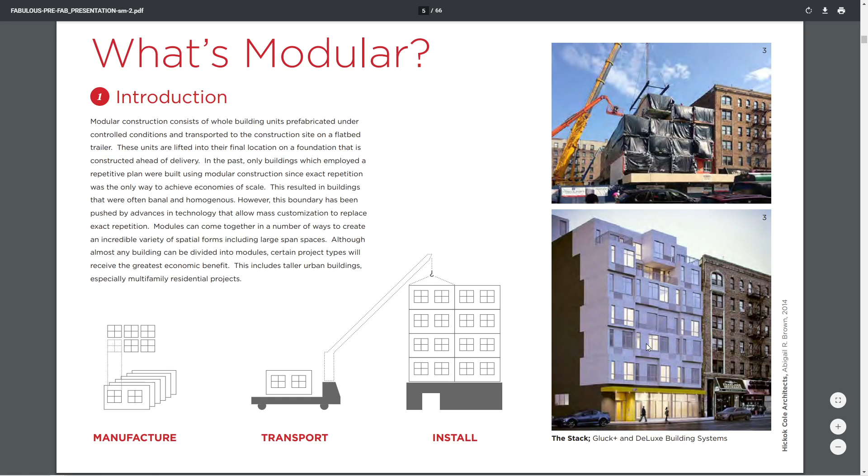You have the hyperlink from the slideshow, take some time to look at this. They introduce us to the idea of modular construction, obviously for people who have almost no architectural experience. The idea of it going up, you see the weather protected modules, notice the crane, the hoisting rigging up here, and then the finished look of that project.

What's going to happen is we look at why modular. They talk about faster schedule. That could be significant on a project depending on where it's being built. But there is this idea that by using modular components, we can have a shorter lead time to the completion of our project. Cheaper labor, work done in factories, less time doing the work because it's more regulated.

More control over the labor source. But there are also negatives with this idea of cheaper labor. Do we have control over the exploitation of labor? Is there equitable work standards?

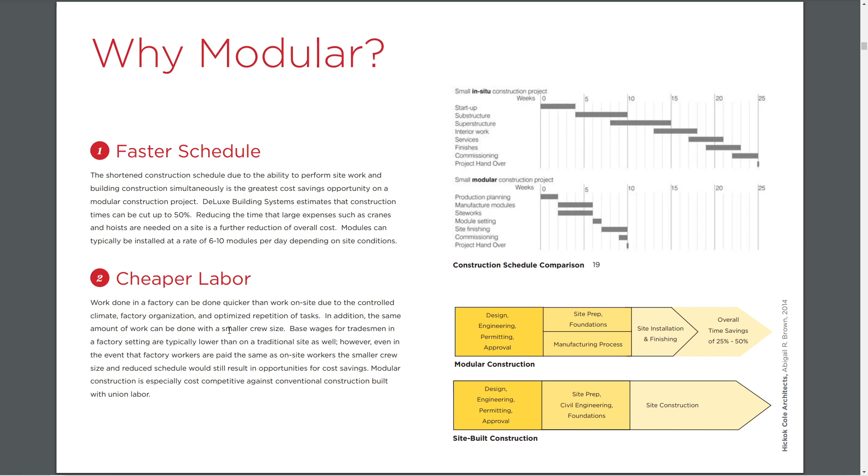I think higher quality is one that we can really hold up to a test. Typically, things that are built in the factory to specifications can be quality assured more easily. There's more traceability of componentry. A lot of things happen when we look at manufacturing in a factory environment, and the idea of less exposure to weather.

But at the same time, building construction methods are really quite sophisticated. The idea of things that happen with exposure to weather are in many cases well controlled on modern construction sites. Worker safety is another issue, once again the idea of falls and things in systems that we have no control over, or environments that we have no control over.

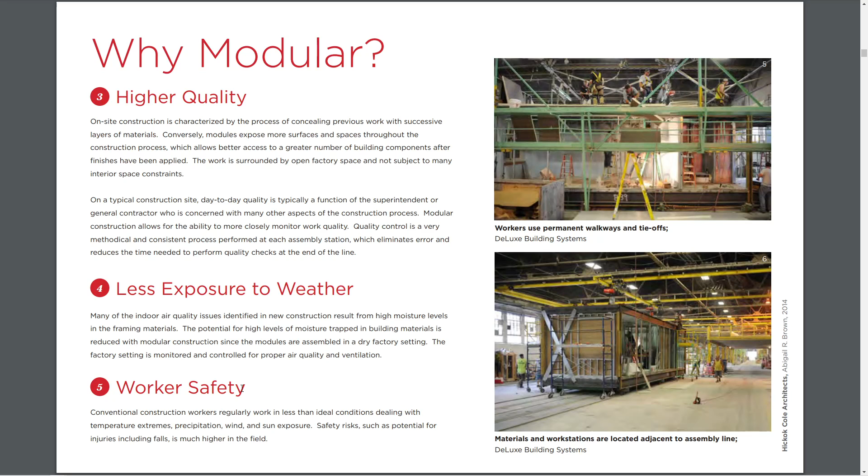But the flip side to that worker safety is the idea that we may not have control over the workplace of remote locations where modules are being made. As we saw, modules being made in Poland and shipped to the United States. So there could be places where our buildings are constructed where worker safety is not paramount. And when we talk about safety, it's not just physical hazards, it's environmental hazards, working hours, standard of living, quality types of things.

Less material waste, I think, is a great possibility. Factories could have much better control over recycling and control of the amount of materials, especially since all of their unit cuts have a certain consistency to them. And then they go on to talk about less environmental disturbance.

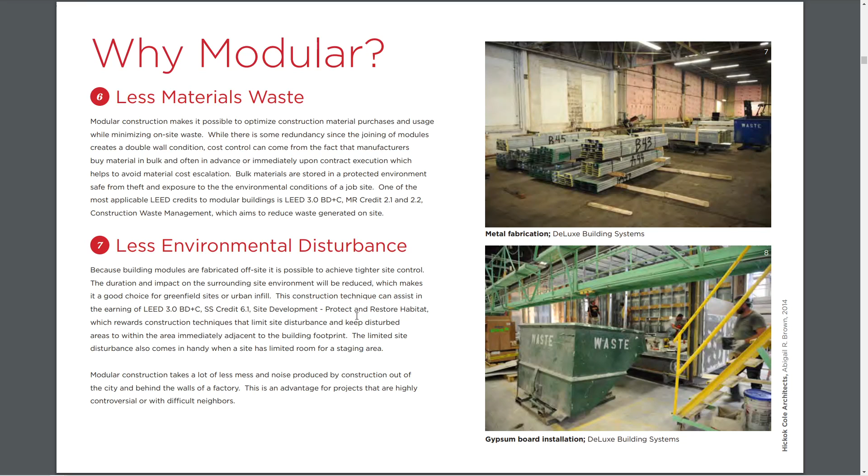These get to me a little more harder to pin down. So the idea of why not modular, what are the problems with it? One of them is this idea that we can't build as tall. We have over-the-road limitations for shipping things, typically 8 foot 6 inches wide. So the floor-to-floor height is different as compared with conventional construction methods.

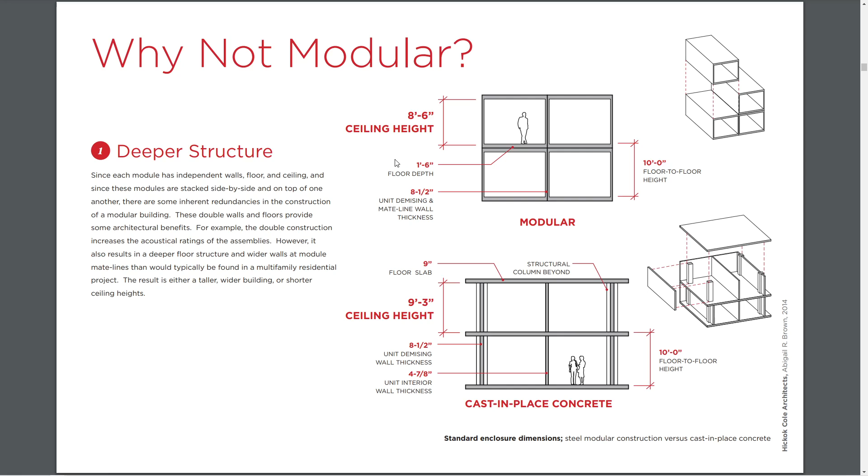In residential construction, this might not be significant, but there's always this idea that we're creating grander and grander residential units. These are typically high-end constructions in many cases. So the ceiling height might be a real limitation to the perception of quality of what's being built. And there's no reason why these couldn't be higher. They just come with new constraints about shipping and transport, and therefore transfer to cost.

This idea of labor rates for locations about where things are being built. As they say, certain places it may not make sense because labor rates and the union relationships are disruptive.

I don't want to spend too much time on cost. I don't think that's really where we want to go with our advanced structures look at things. But obviously this may be your only touch with looking at the overview of modular construction.

The market perception of modular, I think, is changing. This image over here, actually, I find quite intriguing. But modular construction today, I think, is relatively a respected way of thinking about constructing, especially when we look at this idea of

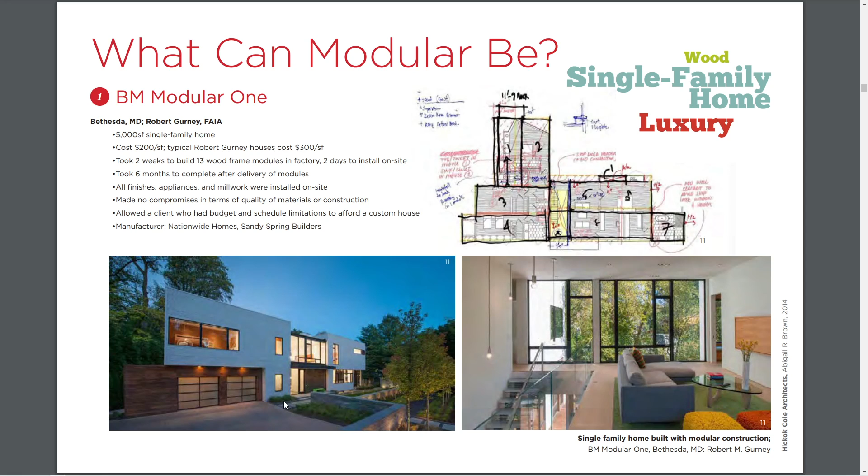custom-built homes and modular. There's a lot of publications now about the quality of modular construction for single-family residence, high-end residential construction. And in this case, I think that there's actually a flip of the cost. Modular construction, I think, in many ways can be less expensive than site-built because of the one-off nature of the construction. Who's on site, the coordination of contractors and skills can usually drive up complexities over conventional custom-built homes.

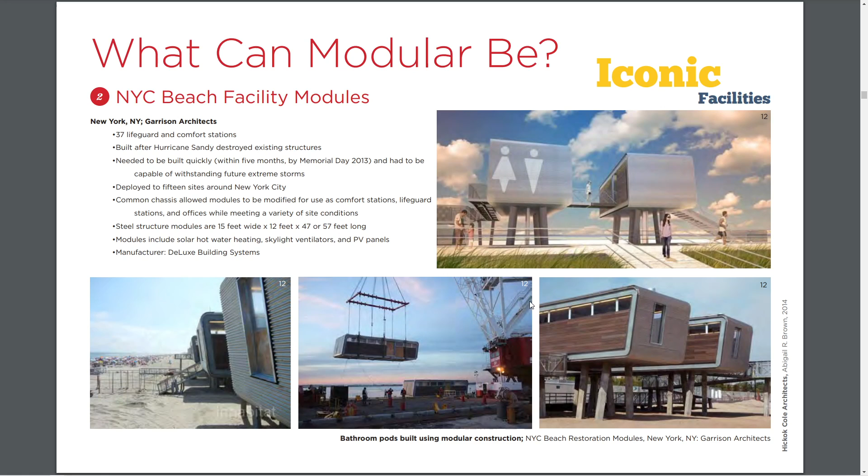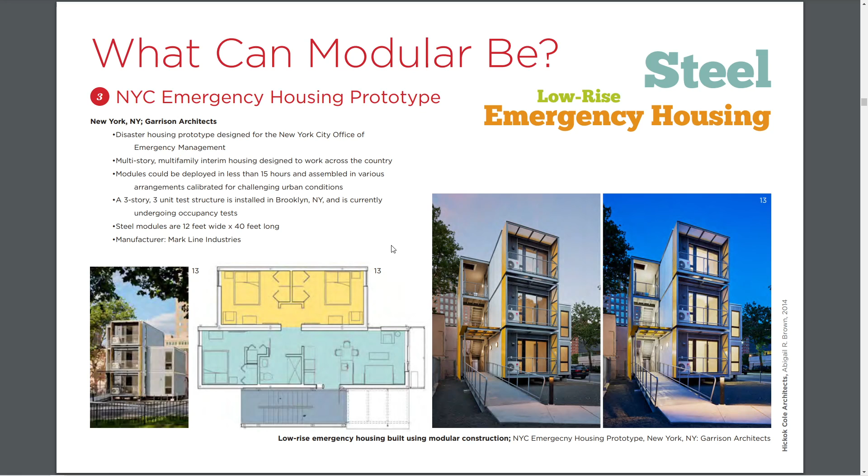Obviously, this is the far-off kind of idea of what modular can be in these beach structures. A little more onto what we might see as thesis projects or other things, emergency structures, emergency housing systems. These became really significant when we looked at what China was doing during the inception of the pandemic and building a quickly modular hospital system.

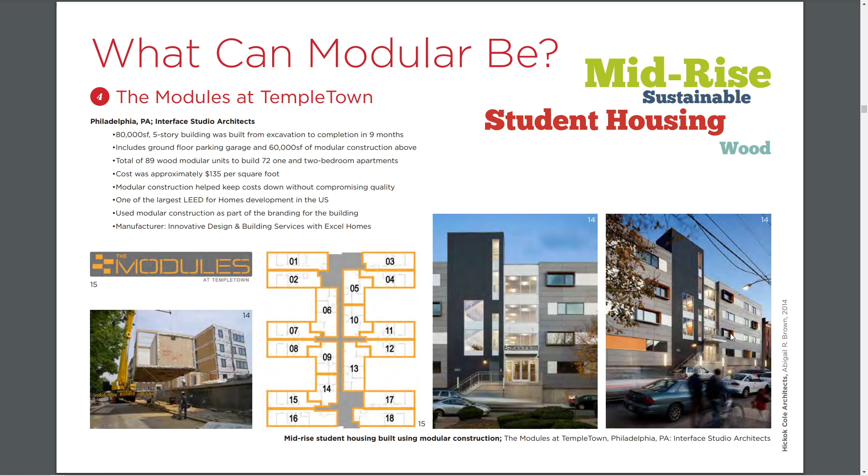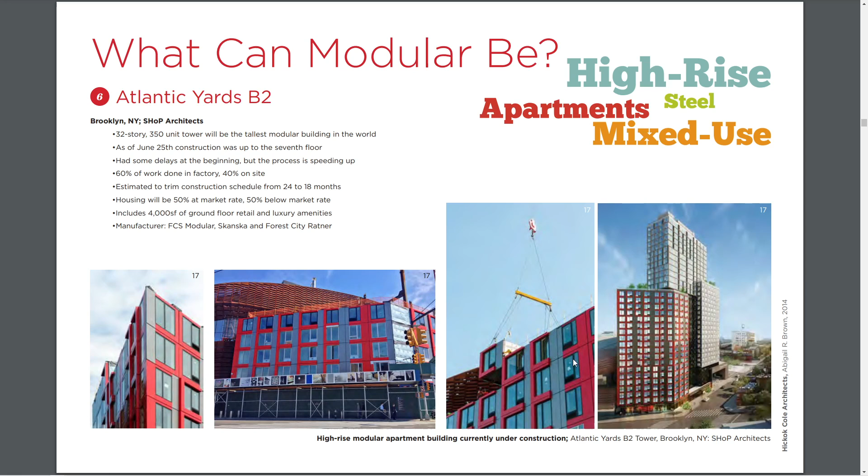This is an interesting one because of the idea of the modules not looking like modulars, because there's an overlayer of the facade. And here we have just condominiums. They're showing us some building types. This is SHoP Architects. I think this is unique because of what they've done to articulate. They're not hiding the modules, they're just articulating the modules with unique elements, something that we kind of pay attention to in our project.

So they go on a lot about play with architecture. I think one thing to be forewarned about: once you start moving these modules back and forth like this, you have to concern yourself with load paths. But in many ways, these modules can all have the same basic structural depth, with extensions that don't drive the load path down. What I mean is they can be balconies or things cantilevered over the front edge of the module. So we have this idea of expression of module systems and different unit configurations.

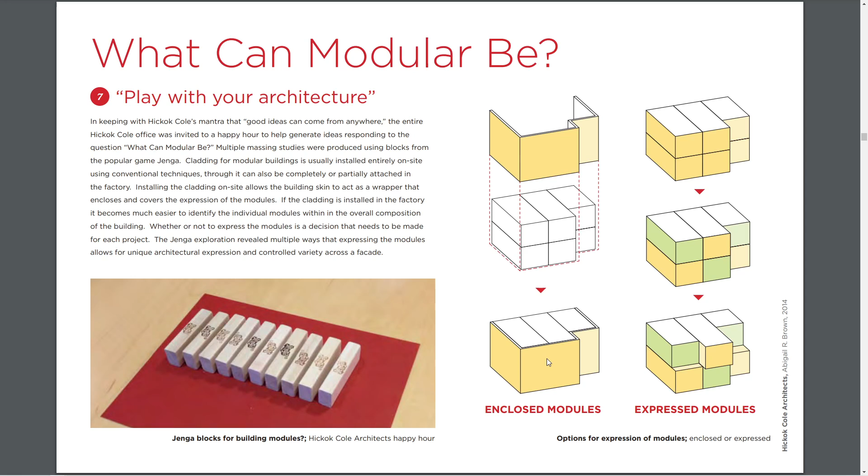This one is what I was talking about before. You have modular construction, but you've done a final facade that encloses those modules, disguising the modular elements that build up the full facade. And here we have these facade elements moving back and forth.

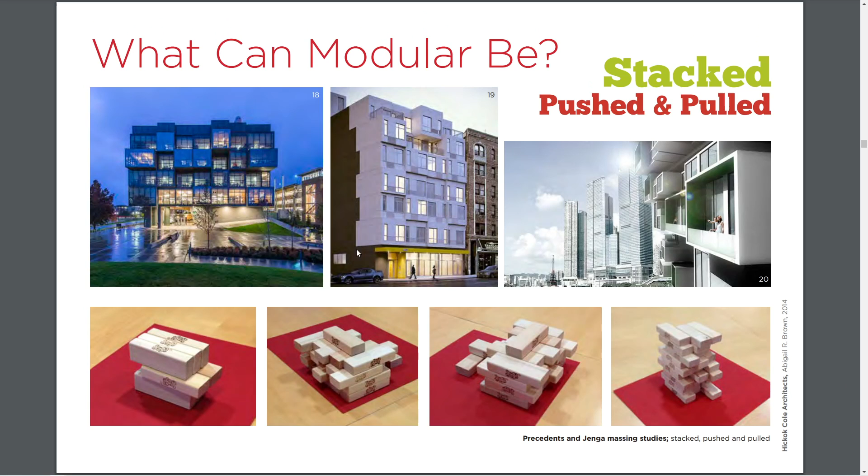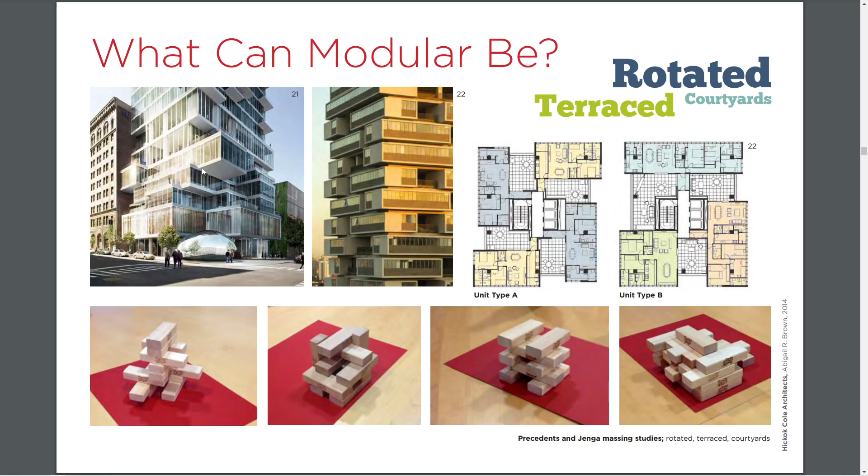Really beautiful new articulations of shapes here, but a huge paradigm shift to the idea of cost. Now we have really significant issues, and I don't even know if these are all modular constructions or just designed to look like them. We have really complicated load paths to pull through here, which makes it look like steel frame stick-built construction might be a better way to go for this type of module.

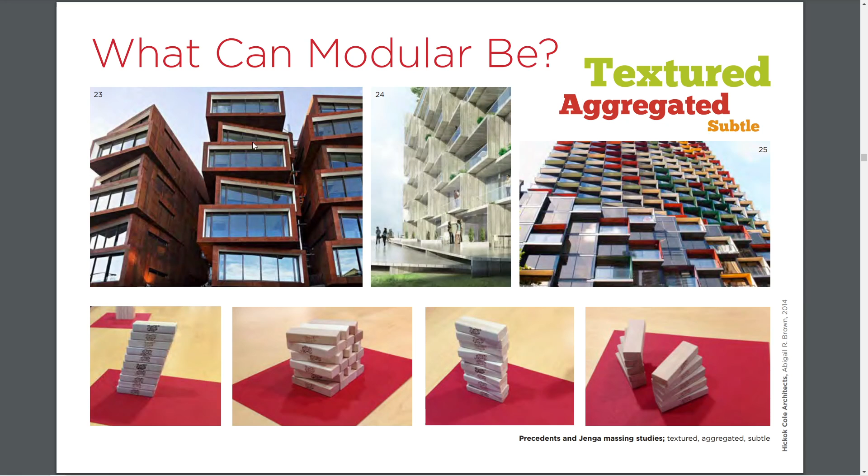But there are obviously places where these modules can be well predicted as far as how load paths are transferred, because each element repeats on itself in a similar way. So I'm not totally discouraging that idea, just throwing up a warning flag. In this case, it looks like it's not doing much twisting, so there's not much transfer of load path. The more I look at it, I see these really large cantilevers.

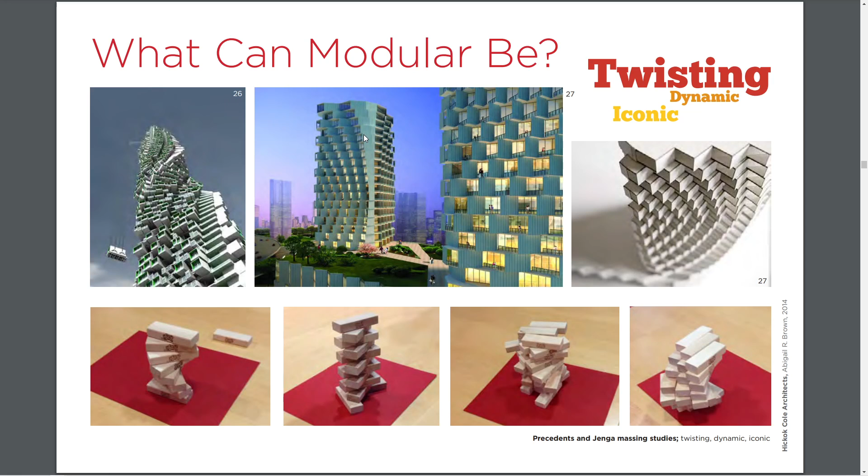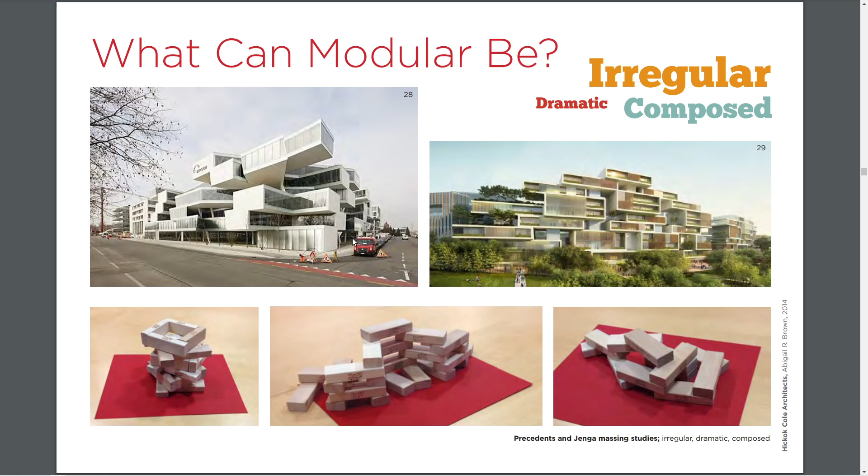So we're pulling load paths back all along this front facade, which means the steel in each module needs to be somewhat different. Really quite complicated. I think they did a lot of this because they had blocks and then found associated projects that went with it. So I think we can be a lot more successful with beautiful architecture, but more tame in our massing systems.

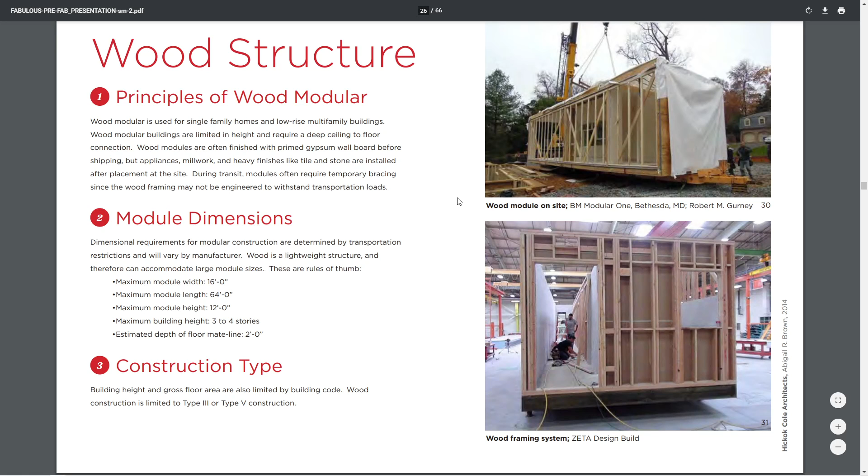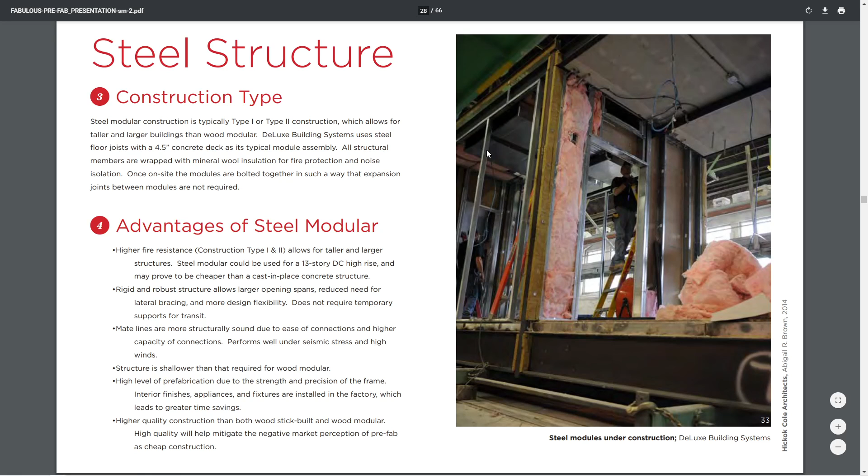So they just compare wood structures and steel structures, talking about modular dimensions that work. In wood frame like this, we're talking 3 or 4 stories. We know we have modular construction systems that exceed that in heavy timber. With steel framing, I think we can think about this very similar to mass timber construction. It's just a comparison between those two.

I think it's nice to point out and pay attention to these. Look at this idea of the double wall between units - this has both advantages and disadvantages. Obviously a duplication of the construction systems, but we need these double layers of plasterboard and air breaks to control sound. In many cases, this duplication of surfaces from one unit to the other is not necessarily a negative or a significant cost increase in our construction systems.

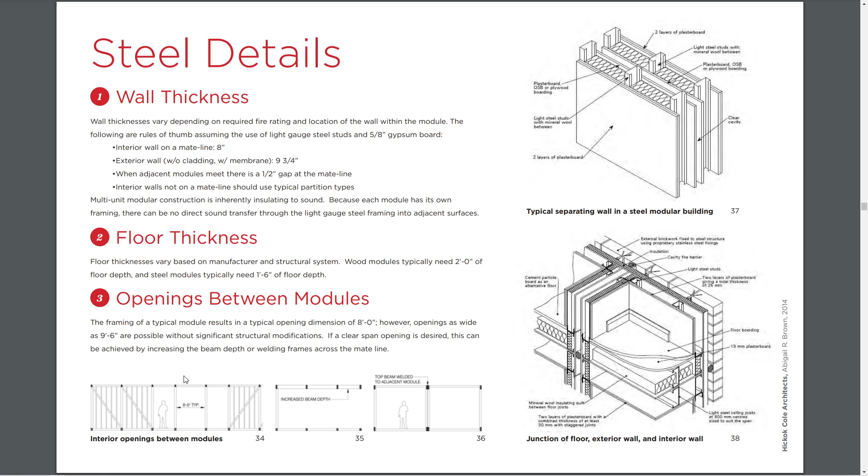We'll notice down here the diagonal bracing to create stiff assemblies in steel, and then allow for openings between modules, because one module placed next to the other allows for the double width of a unit. And some steel details.

Permits and inspections - obviously the big flag that comes up here is we're having a module made in a municipality that may not be the one where the building's constructed. There's coordination needed between two municipalities about where certain parts of the construction are inspected, what approvals are met, and whether those are accepted by the final destination of the building. This is a very complicated issue that needs to be addressed very early in any conceptualization of modular construction.

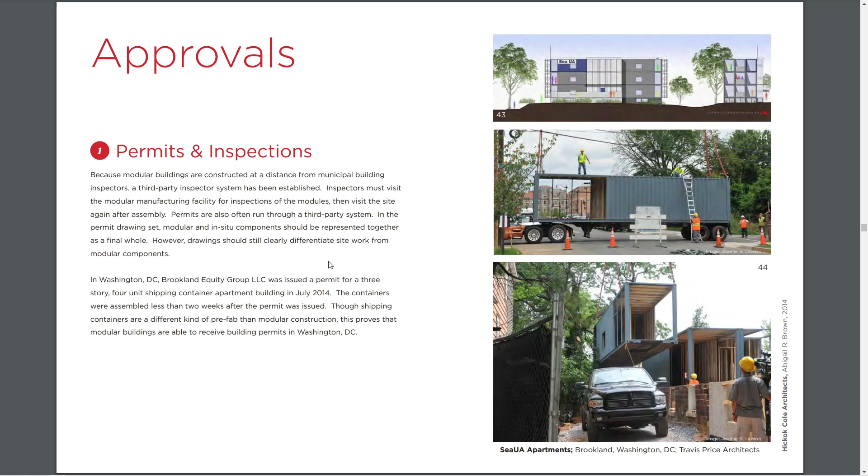Typically it would start with the modular building manufacturer, who has already established relationships, finding out if they already work with other municipalities, especially the one you're considering, and laying the groundwork for that. Then there's the idea of actually finding that manufacturer and its relationship to your project, and whether that's feasible. There's the possibility you conceive modular in a place so remote from where modular construction is happening that it just makes it a quick non-option.

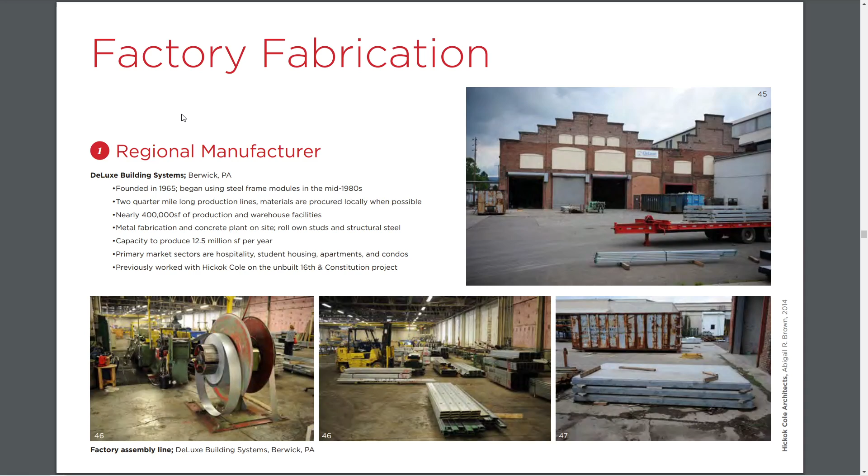Just some shots of factory work.

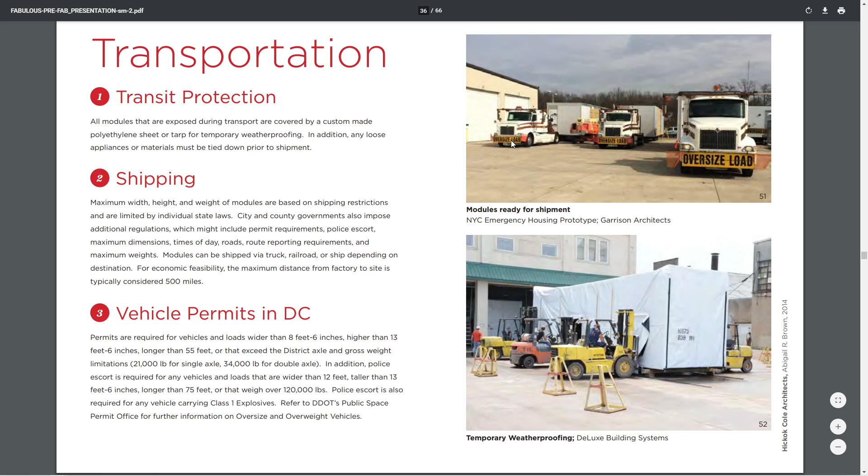Transportation, once again, that idea of the width of the module. If it's 8 foot 6 inches wide, it can go over the road without any special considerations. Once it breaks that, it becomes an oversized load, and transportation becomes a lot more significant, the cost involved with that.

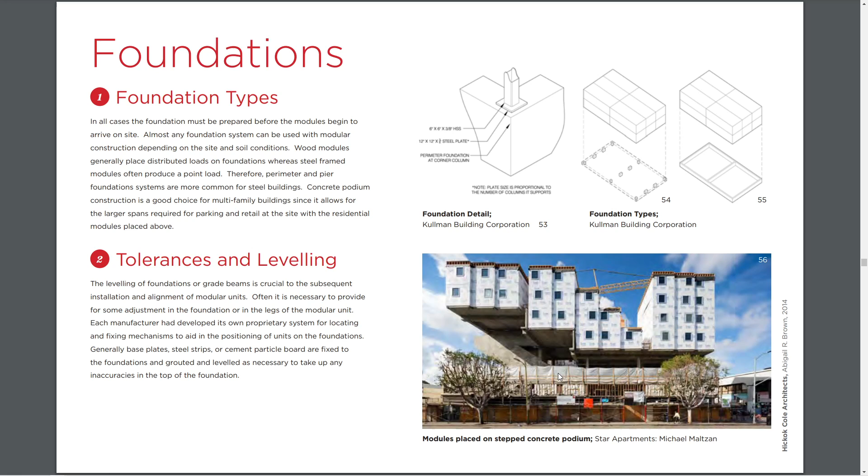Foundation systems. We've already discussed this idea of a soft story, that we're supporting multi-story buildings above what is called the podium, and typically those podiums are constructed of concrete. They could be constructed of other materials, but we have to be strongly cognizant of not creating a soft story for seismic reasons. Concrete typically lends itself to making very rigid, reinforced moment frames and shear wall assemblies, so it's usually a choice for the first floor podium construction.

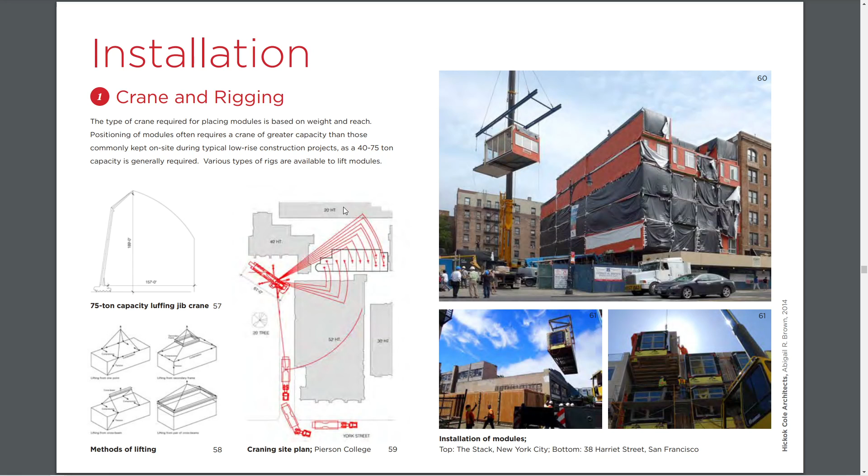This is an elevation view, and in plan view we have that crane. We have trucks coming in delivering modules, actually lifting and swinging over an existing building to the site, and this idea of being able to move these modules in a staged way. Which one goes first? In this case, it looks like they need to make clearance to come back in and place those modules. These could be, in certain sites, the deal killer on whether it's practical to do modular construction.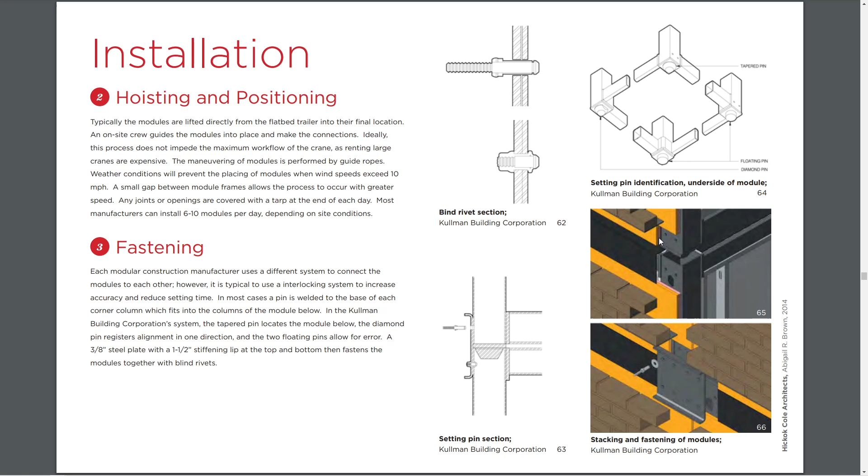These are nice images of that idea of what happens when these metal parts come together, and then how are they connected to become continuous load paths.

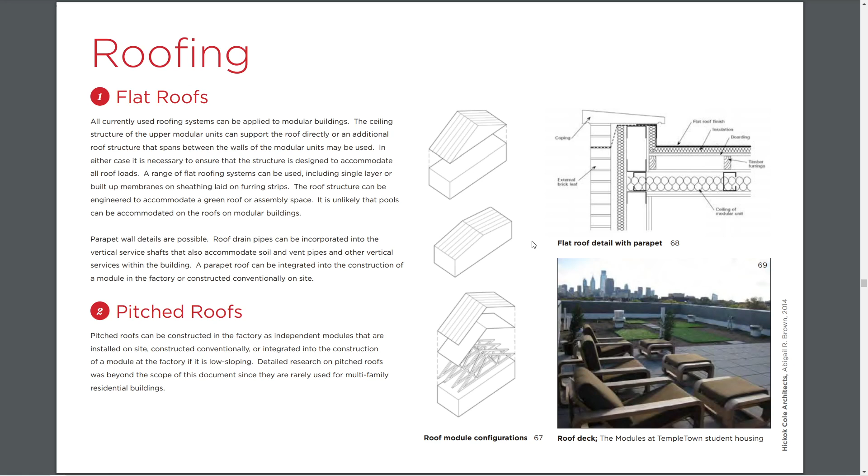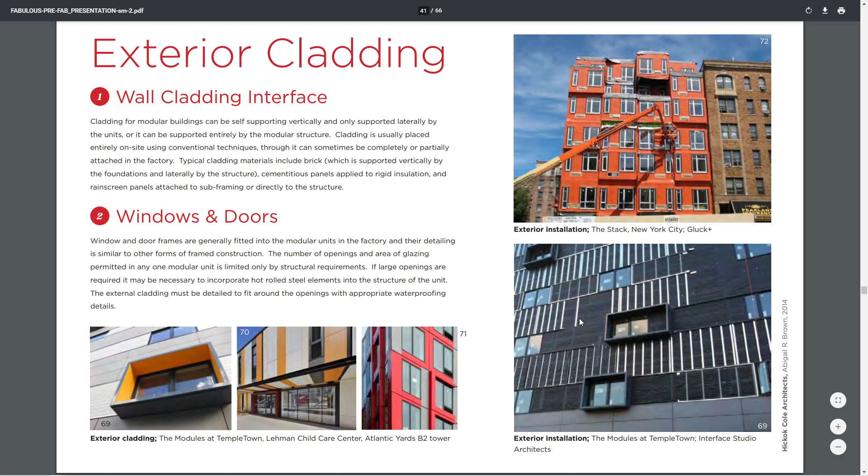Once again, that idea of wall cladding. We have modules put in place, but the wall cladding systems are added afterwards, used to mask that idea of individual modules.

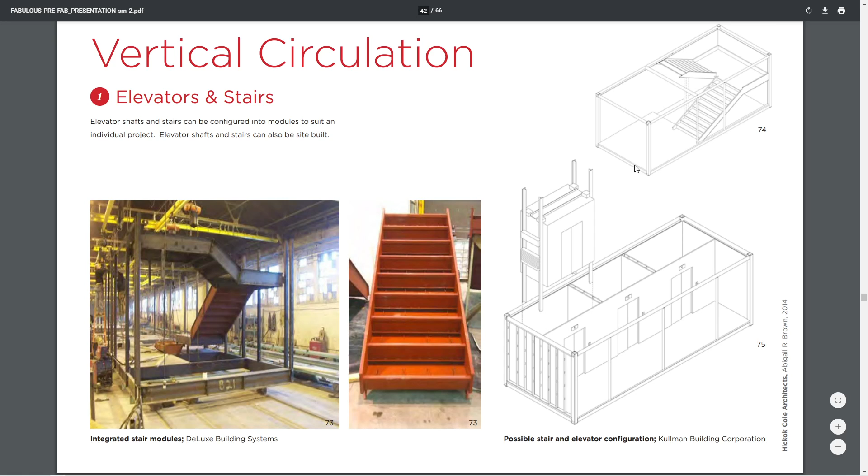This is kind of a neat idea of prefabricating even the vertical circulation systems into modules, even elevator shafts in specific modules.

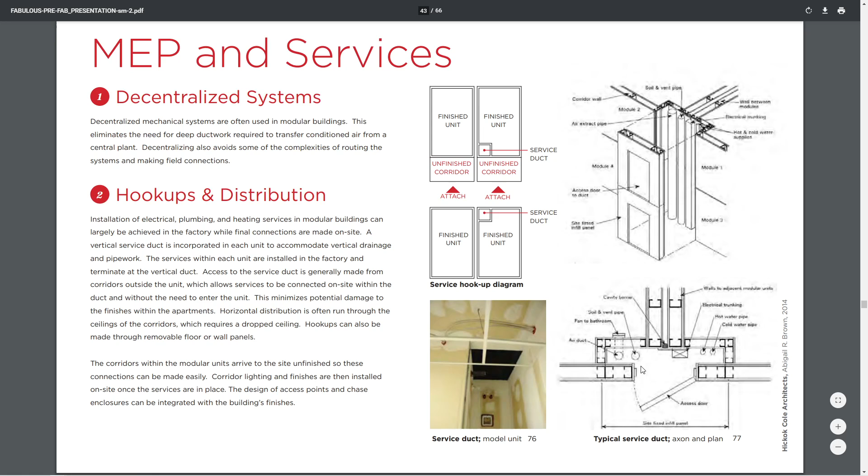We really need to concern ourselves with the idea of mechanical plumbing systems, these risers that go up in multiple story buildings. In this case, the modules have a little notch in them that allows a cavity between them to be created to run those utilities up between the units. They could be part of each unit or just part of one unit. Here you can see it, a unit here and a unit there, and then the ability to put an access door there to do the hookups as the modules are built.

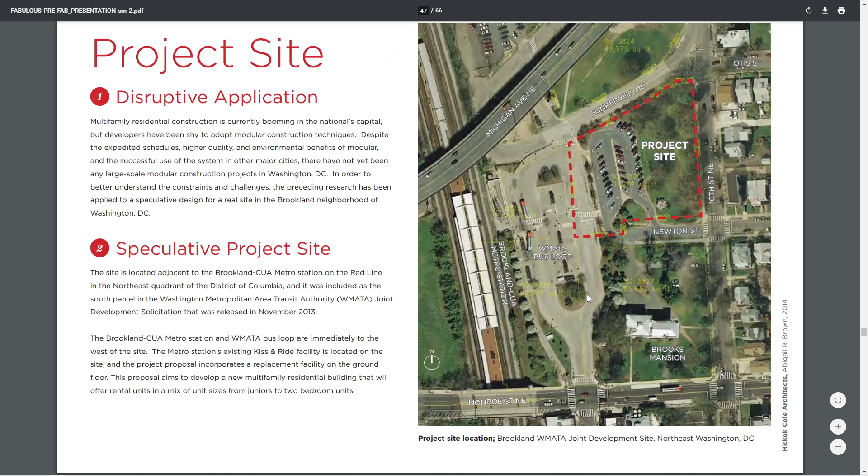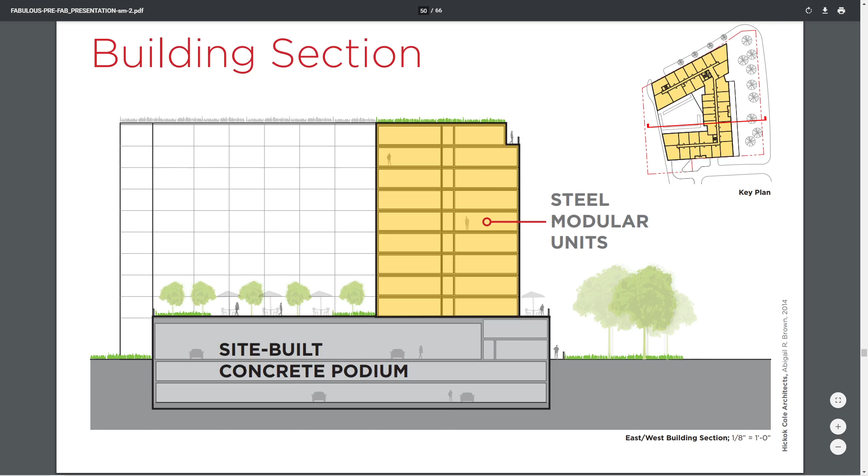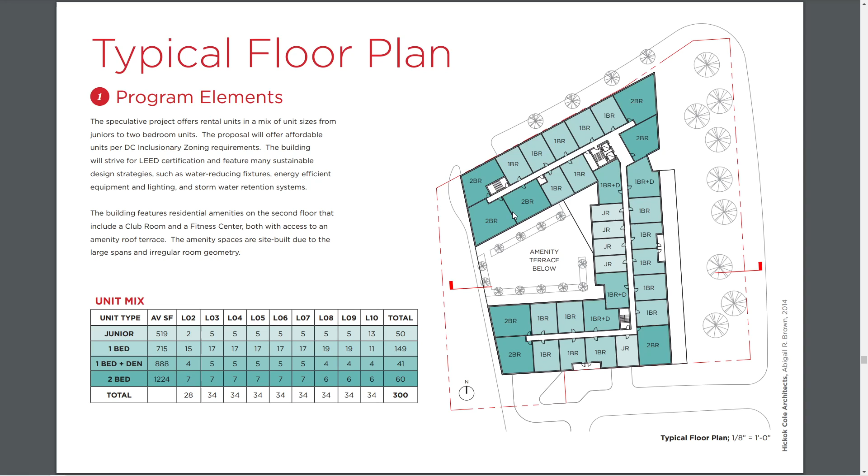I find this to be strikingly similar to what we'll do later on in this semester with TestFit, which is a generative design program. Well, it's probably overreaching to call it generative design - it is a parametric assistive device to help us do these kind of layouts, and does this automatically for us.

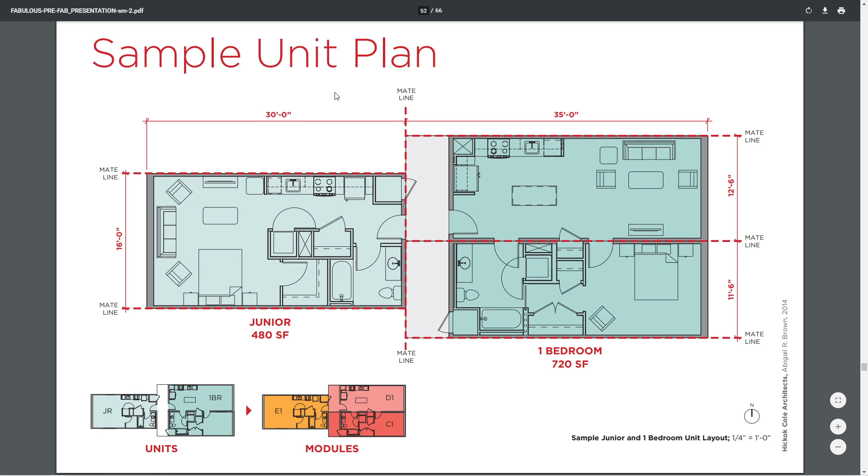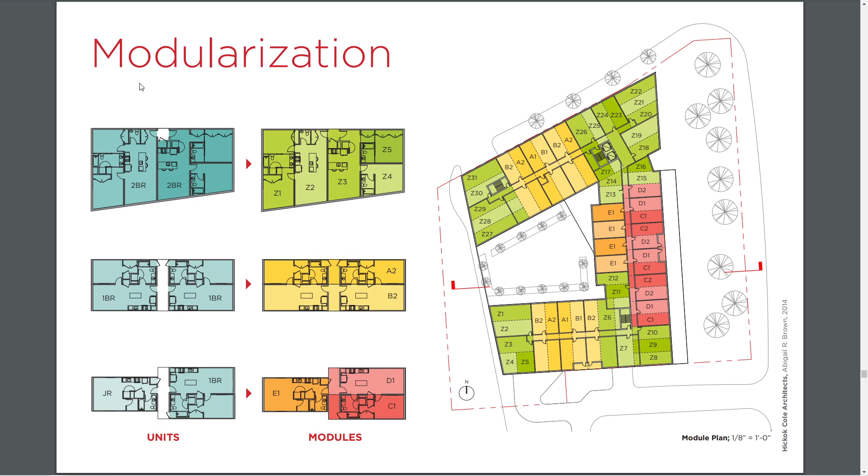Unit design. One of the things to pay attention to here is the requirement of 11 foot 6 inches for something like a bedroom, and how if we're working on an 8 foot over the road module, we need to be able to join two modules together in order to create these kind of large spaces. So there may be limitations - there may be actually desirable limitations in your modular concepts because unit sizes are going down. We're much more in large urban areas thinking about micro units and mini apartment units, compact, to increase density and reduce unit rental cost.

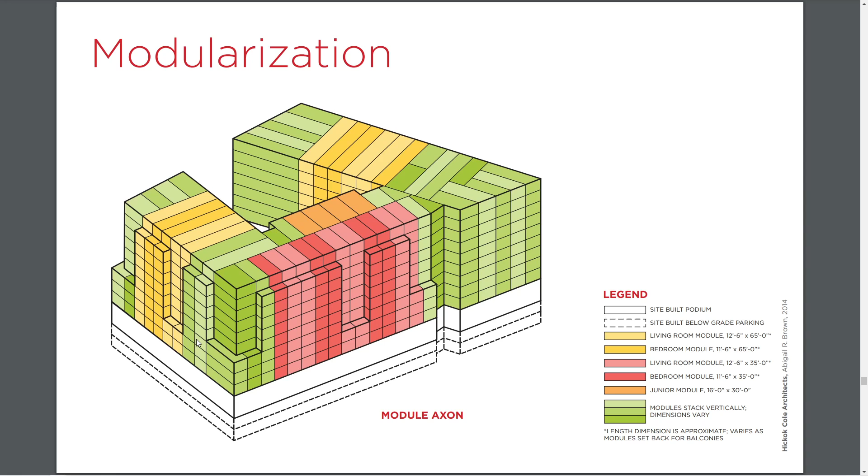Once again, a lot of this is really becoming automated. There are many pieces of software now that are helping us, or assisting us, in doing some of these layouts.

And then this is going to finish off with cost analysis. You can see the idea that in a union job, just the penny savings, so to speak, of modular construction - maybe more significantly the opportunity for some time savings. And this time savings may directly relate to money, especially in places like Manhattan, where disruption is a huge cost premium. But there are other places where the length of time to finish may not actually be a significant factor in the project.

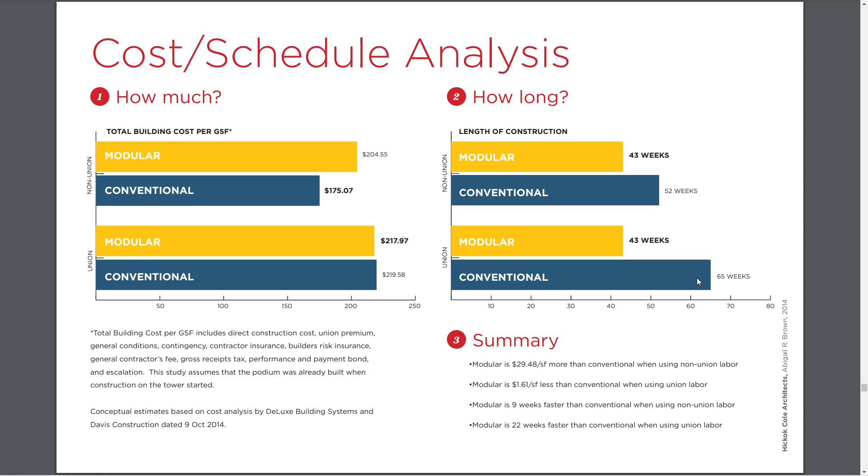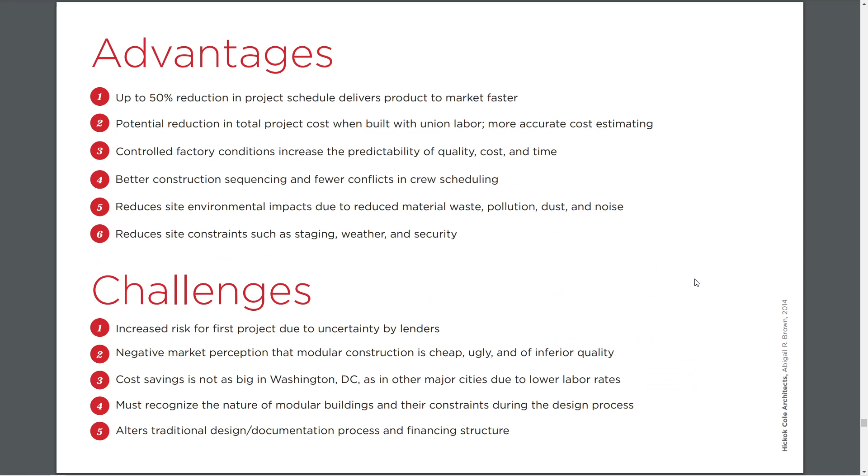And then they get into really deep project return cost analysis. And that's it.